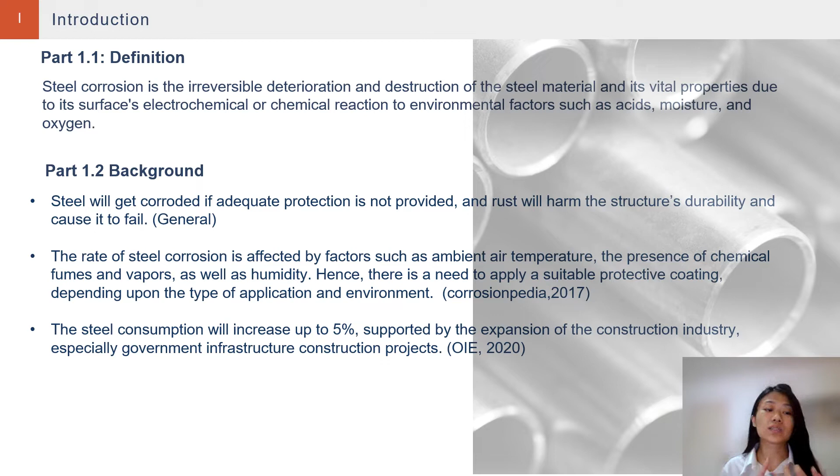As well as extend the service life. Now moving to the problem statement: the main problem is that in Thailand, they do not have a specific steel corrosion standard, and the studies done on steel corrosion are very few. So this research is to help contribute to the development of the steel corrosion manual, as well as provide more information on steel corrosion in Thailand.

So my main objective for this research is to gather more knowledge about the coated steel for the Thai structural steel industry, to know the importance of galvanizing, and to compare the uncoated and hot dip galvanized steel. All this will help in material selection as well as contribute to the development of the steel corrosion manual.

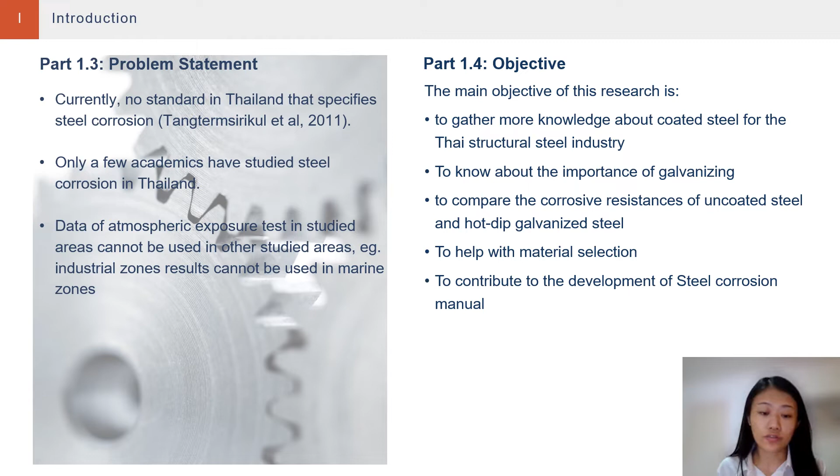For the scope, the type of steel we will be using is carbon steel, and there are two types: SS400 and SM490.

The area of study is in the eastern part of Thailand. There are three locations in mainly two provinces: Chachoengsao and Chonburi. In Chachoengsao we have Union, and in Chonburi we have Cotco and Sangchareon Eastern Galvanized.

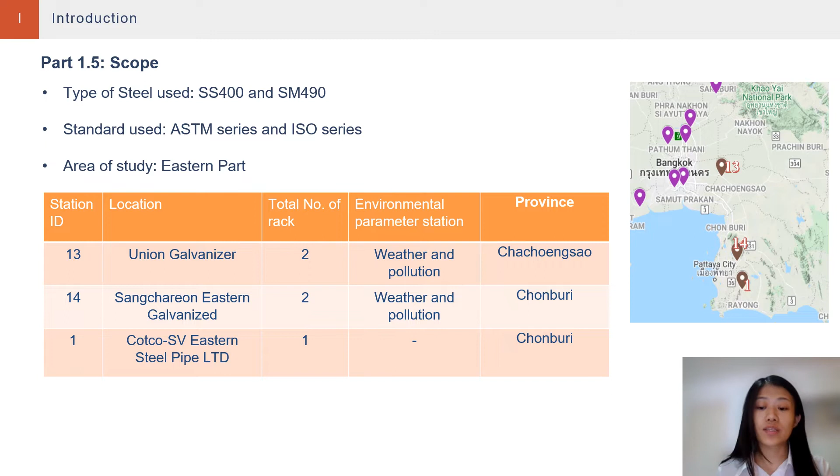The standards that we will be following in this research are ASTM standard and ISO standard.

For the methodology overview, we have three stages: exposure, collecting and analyzing. In exposure, we prepare the specimens and collect the data. We prepare the data for collecting environmental data as well, and then expose it. In the collecting data stage, we collect data from the exposed specimens, and in the analyzing data stage we calculate the corrosion rate.

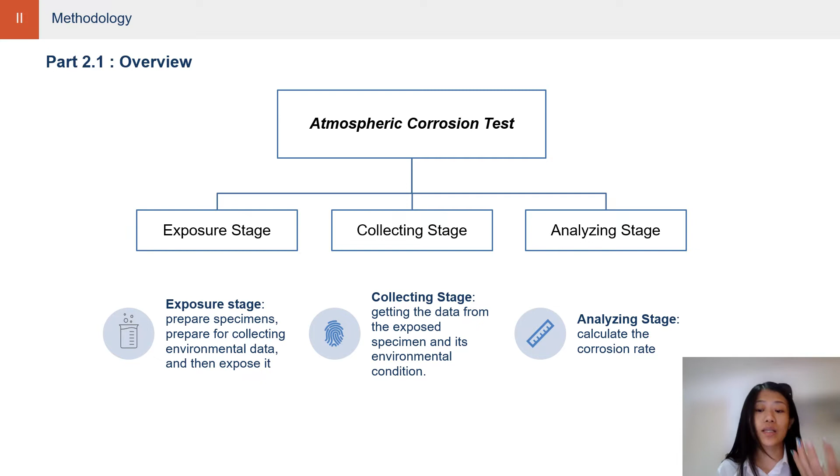Now moving to the first part, the exposure stage. For the specimen properties, the standard we follow is ASTM G92, and the dimension is 100 by 150 by 4.5 millimeters. The period of exposure is 3 months and 6 months.

As I said before, there are two types of steel, SS400 and SM490. Figures 1 and 2 are examples of how the steel structure looks, and the table given below is the chemical composition of the two types of steel.

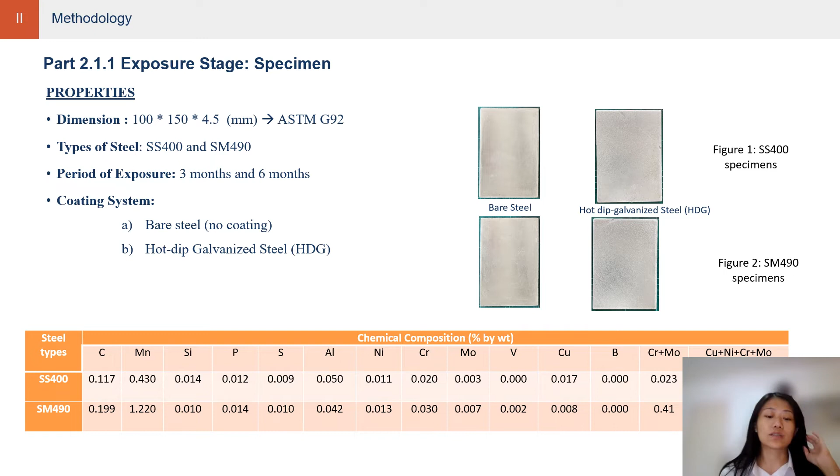Following ASTM G1 and ASTM G31, we prepare the specimens. For bare steel, we follow ASTM G1, and for the hot dip galvanized preparation, we follow ASTM G31.

These are the steps. Firstly, for bare steel, we sandblast, then use sandpaper to smoothen. Then we mark the specimen to be able to identify it, and then we measure the dimensions: 3 times for the height, 3 times for the length, and 8 points for the thickness.

Then we clean it with DI water and dry with an air dryer. After that, we weigh the specimen, store it in the desiccator, and send it to the station that we require. We do the same for the hot dip galvanized preparation as well.

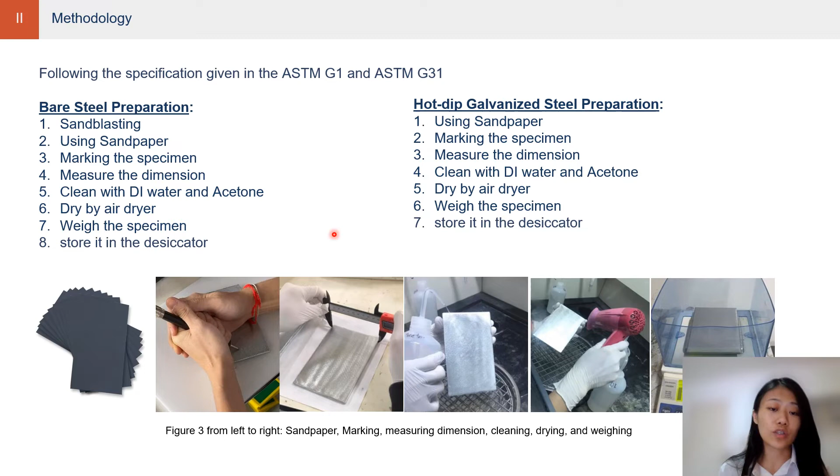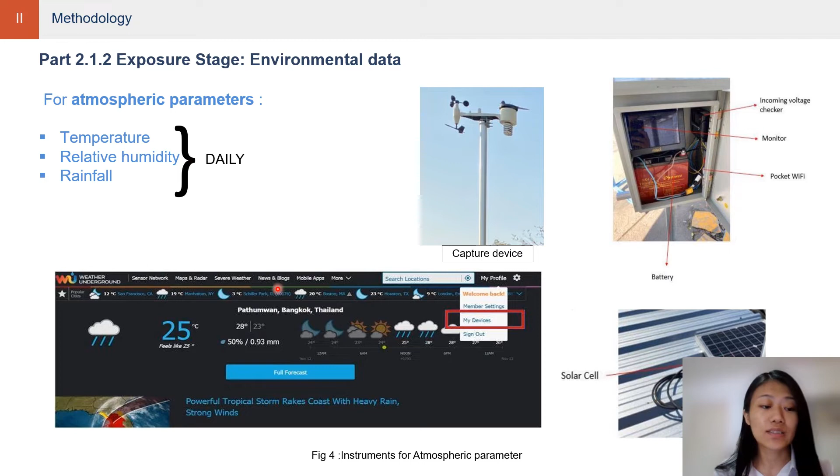Now moving on to the environmental data, the atmospheric parameters we collect are temperature, rainfall, and humidity. These are the instruments that we use to collect the atmospheric parameters, and the data is directly sent to Weather Underground.

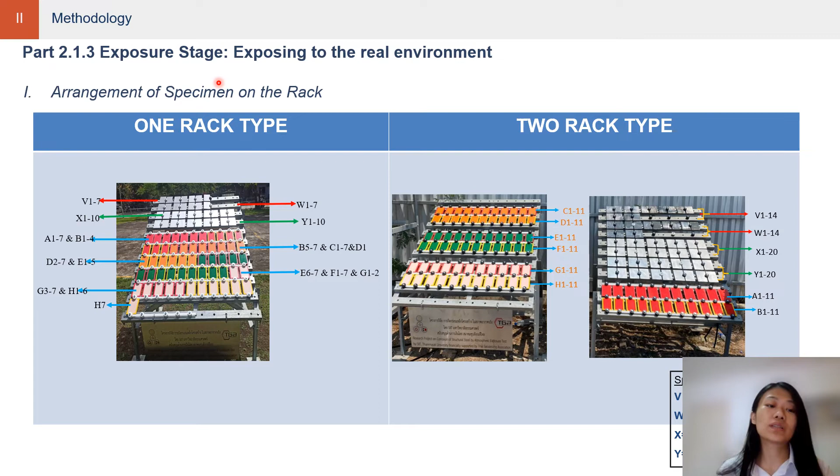For the arrangement of the exposure stage, exposing to the real environment, in some areas we have one rack and in some areas we have two racks. Depending on that arrangement, we arrange the specimens accordingly, and this is how the station would look after exposing.

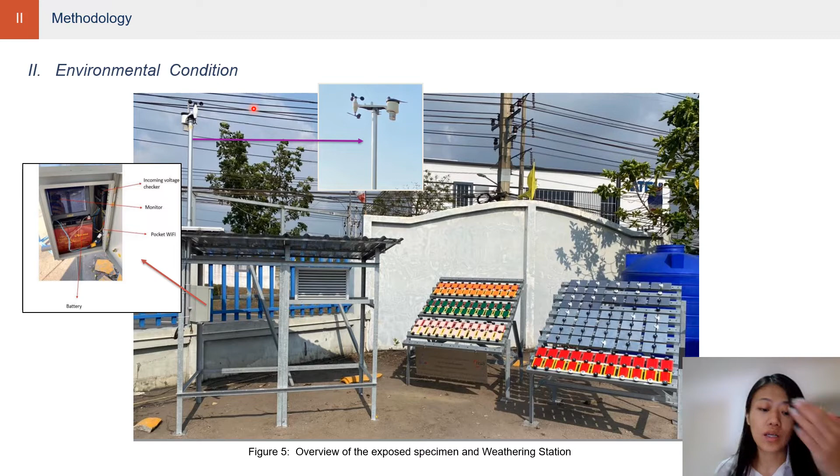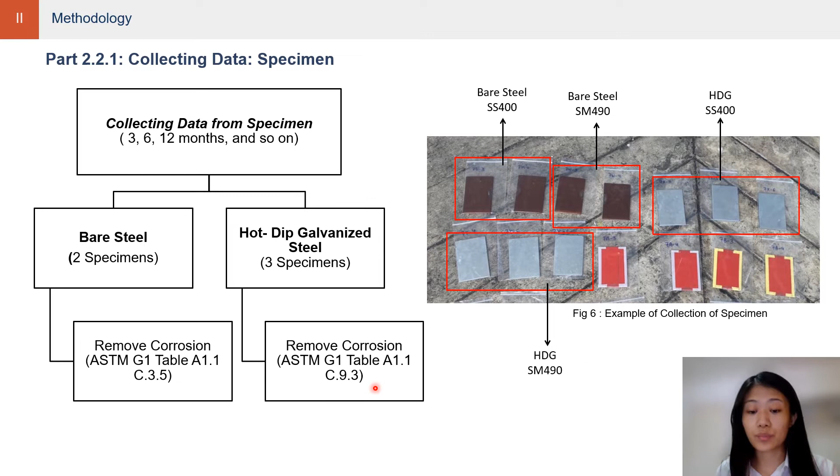Now for the collecting data stage, we collect two specimens for bare steel and three specimens for hot-dip galvanized. After collecting the bare steel, we remove the corrosion by following ASTM G1 table A1.1 C3.5 standard, and for the hot-dip galvanized, we again use the same standard ASTM G1 table A1.1, but we use C9.3.

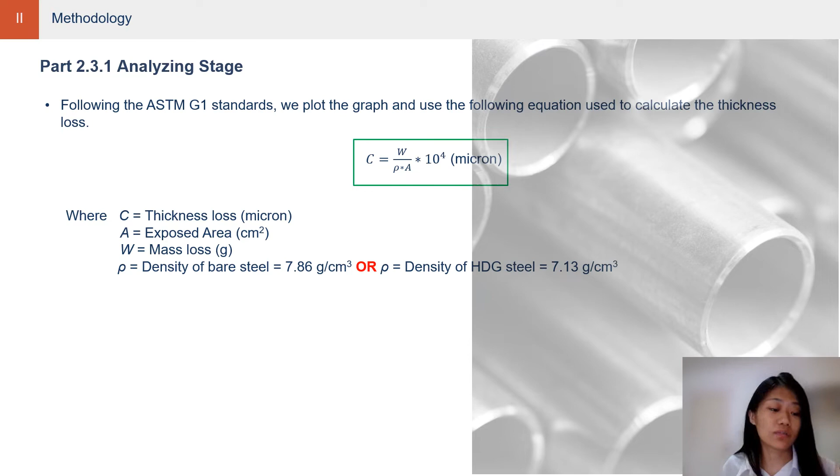Now we are in the analyzing stage. For the analyzing stage, we follow the ASTM G1 standard as well, and then we plot the graphs and use the equation to calculate the thickness loss. While calculating the thickness loss, we use the formula given here, and for the density, the formula changes. For bare steel, we use 7.86, while for the density of hot-dip galvanized, we use 7.13.

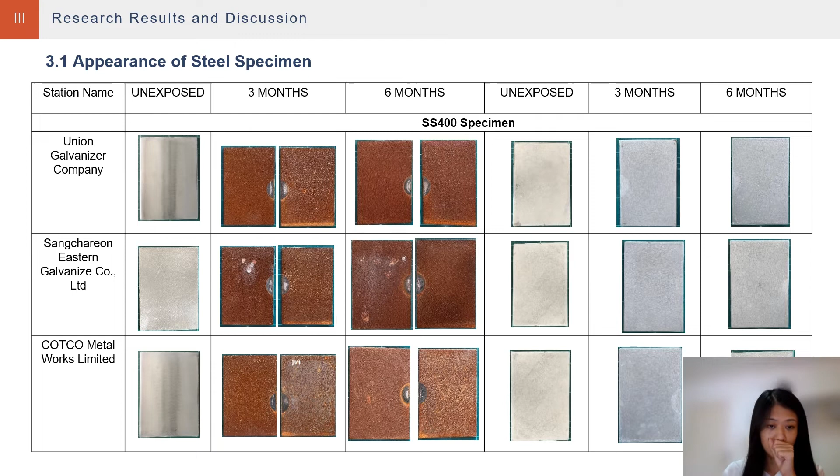So now for the result and discussion. Firstly, this is the appearance of steel specimens after exposing them: unexposed, 3 months, and 6 months, for SS400 at all three stations. From this overview, we are able to make a judgment.

Both SS400 and SM490, if they are bare steel, get corroded. When we compare station 1 and station 14, station 1 has much lesser corrosion product on it compared to station 14. This is due to the difference in exposure time, because station 14 was exposed in March while station 1 was exposed in June. Due to that difference, there is a difference in the corrosion product as well.

If you see the pictures clearly, we see that in 3 months the specimens have a reddish yellow orange rust, while after 6 months it changes to brown. In the hot-dip galvanized specimens, there is no rust production, and after 6 months there has been white rust on some of the specimens.

For the comparison between bare steel and hot-dip galvanized, we can say that hot-dip galvanized can withstand corrosion without any problem till 6 months.

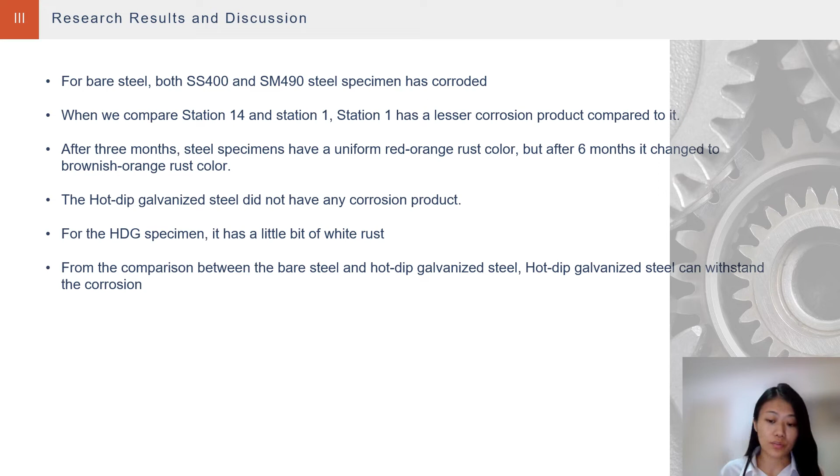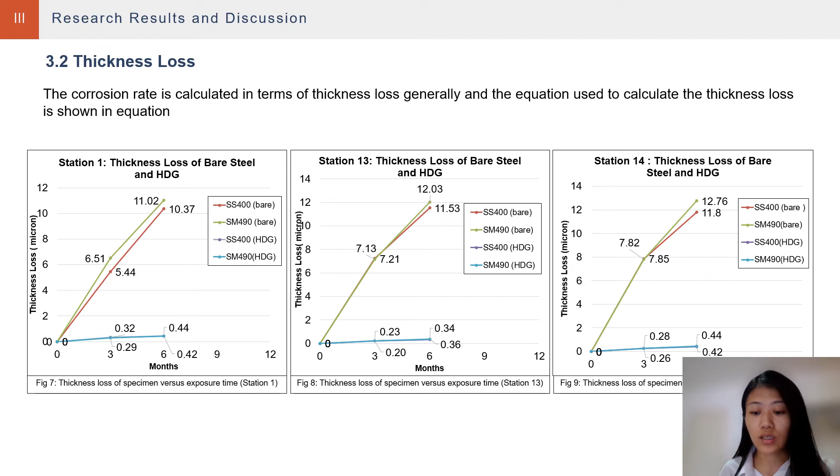Now for the thickness loss, we use the equation shown in the above slide, and then we calculate the corrosion rate. We have both bare steel and hot-dip galvanized in the graphs, and from the figures we are able to know that bare steel has more thickness loss compared to hot-dip galvanized. When we compare the two types of steel structure, SS400 and SM490, SM490 has a higher thickness loss. That is due to the chemical composition, because of the presence of more copper in SS400.

While comparing station 1 and 14, station 14 has more thickness loss compared to station 1, even though they are in the same province. It is because of the different time of exposure, as station 14 was exposed in March while station 1 was exposed in June.

When we compare station 13 and 14, since they are exposed at the same time, we notice that the thickness loss for station 14 is more. This is because it is much closer to the sea. When we compare the rate of corrosion for 3 months and 6 months, we notice that the rate of corrosion for 6 months is lesser. This is because the rust formed during 3 months acts as a barrier for the rust that is meant to form after that.

The thickness loss for hot-dip galvanized is very minimal. This is because the exposed layer is only zinc, and the steel structure remains totally safe.

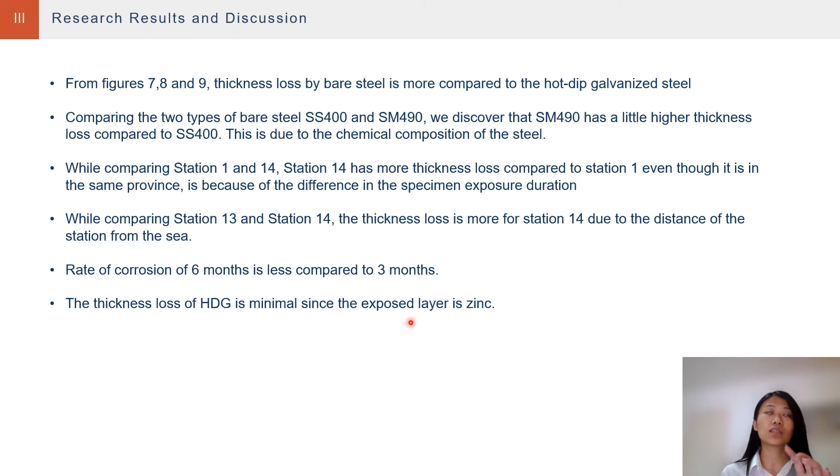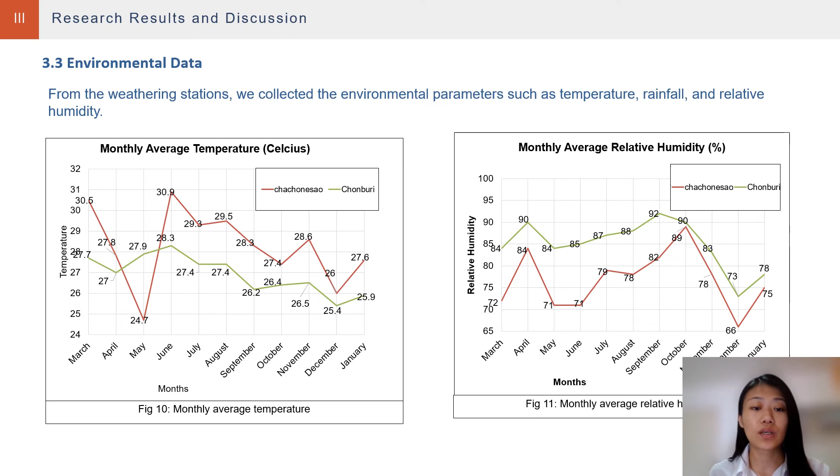Now for the environmental data, we collect temperature, rainfall, and relative humidity. For a climatic condition to be a corrosive environment, it needs high temperature, high relative humidity, and little rainfall. If it has very heavy rainfall, for example for station 1, it has lesser thickness loss compared to the other two stations, because in June, July, August they have heavy rainfall, and therefore it is hard for corrosion to take place as there is not enough sunlight and the temperature is always low. This lets us know that corrosion is affected by temperature, humidity, and rainfall.

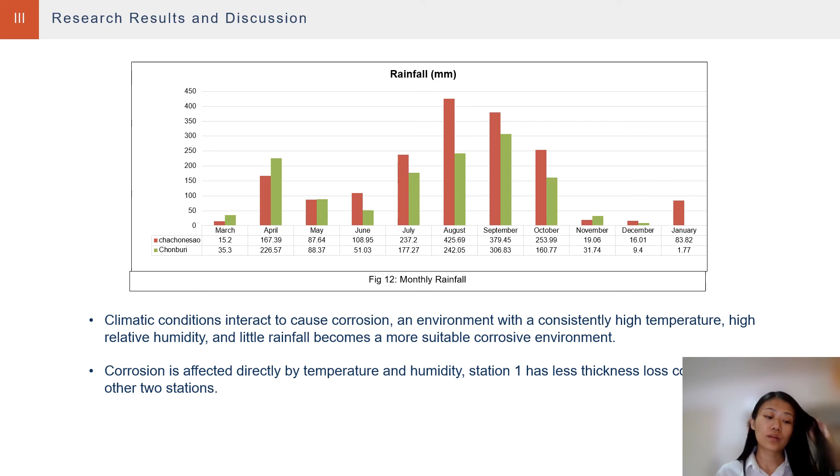Now moving on to conclusion.

Hot-dip galvanized is a very effective way to minimize the rate of corrosion, because when we calculate the thickness loss, we can see that it is very low compared to the rate of corrosion of bare steel, lowered around 30 times, meaning we are able to protect the steel 30 times better. We also know that environment plays a very huge role in the corrosion of steel.

Even if the stations are close together but a little different, the rate of corrosion is different. Also, if in this research we had considered more parameters such as chloride and sulfur dioxide, it would have been more accurate, because it is in a marine industrialized area, but we haven't considered it. From the main point of view of the research, we can conclude that hot-dip galvanized is a very effective way to reduce the rate of corrosion, and uncoated steel is very susceptible to the atmospheric environment in Thailand.